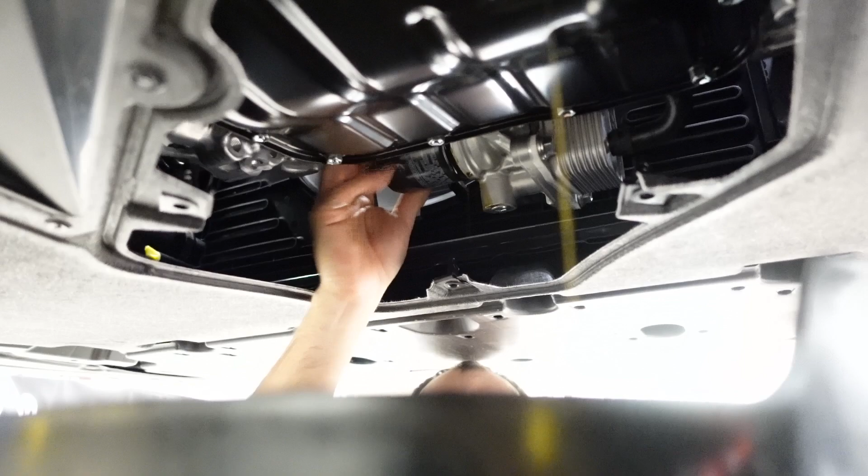Right now it's bone stock, it's done its break-in, so it's time to do a few simple things. First, we're doing an oil change. The motor has about 1,000 kilometers, 600 miles. We're using Liqui Moly Special Tec AA, Asia and America, the 5W30.

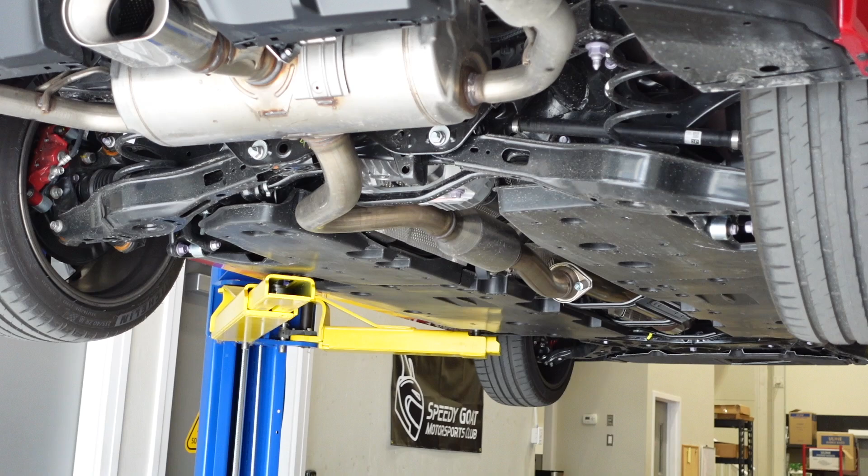We're going for a heavier weight oil because of the track use we're going to put this car through. We've got an oil filter, and we'll be doing some mild heat insulation on the exhaust to prevent it from overheating the diff. Some very mild stuff to begin with, in case we need to take this car out on track on Monday.

There's a lot more coming, so definitely keep watching.

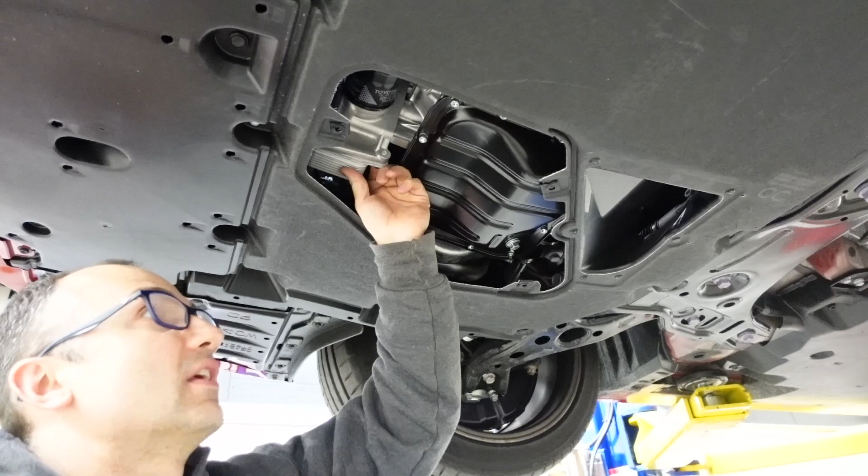I made it pretty easy. I got a filter, and there's a little water-to-oil cooler in here. You can see the transmission, and there's the oil pan. If you're going to take this car rallying, you probably want something a bit sturdier. If not, then you'll be fine.

You can also see some of this ducting done here to cool off the PTU, pointing right at the PTU in the center. The exhaust is sizable in diameter and looks like a high quality piece. I like it. This is your rear differential.

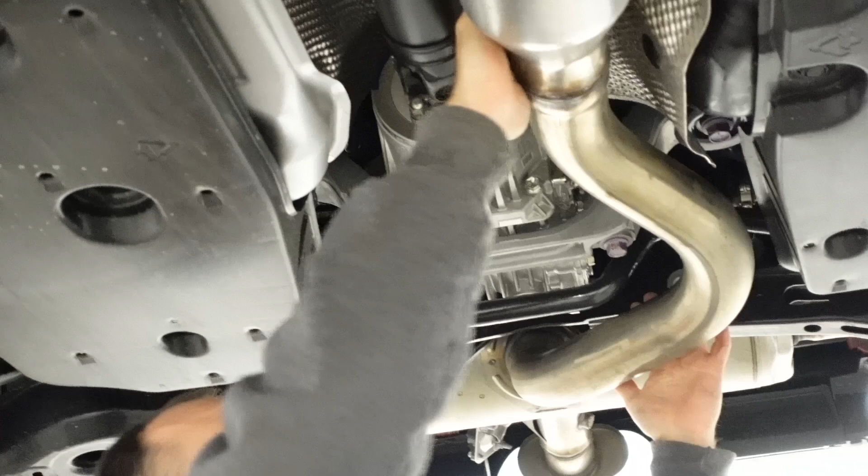The clutch pack lives in here. It's finned for cooling, but an offending member of heating this up is this exhaust. So this is where we're going to be putting that heat shield on, as well as shielding the sensor itself. I've got another way of shielding that. And then there's your three-outlet exhaust system.

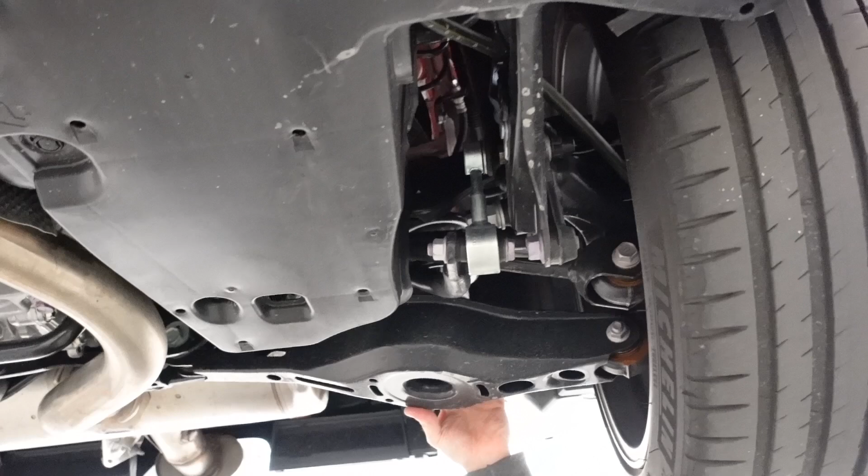Suspension-wise, this is a setup we've seen before, with the trailing arm, a multi-link rear end with springs and shocks that are separated. This cup comes out to put in springs, and I recommend replacing both springs and shocks if you're going to do springs. Of course, we've got some goodies coming in for that.

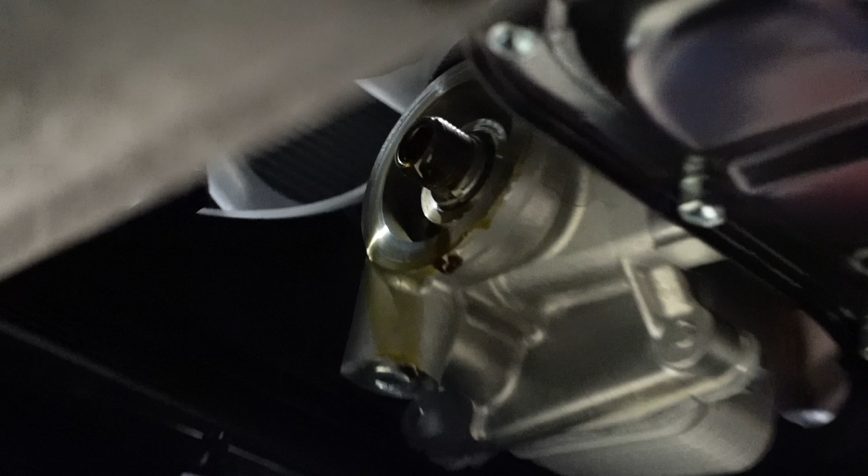Yeah, nice and accessible. And let's drain some oil.

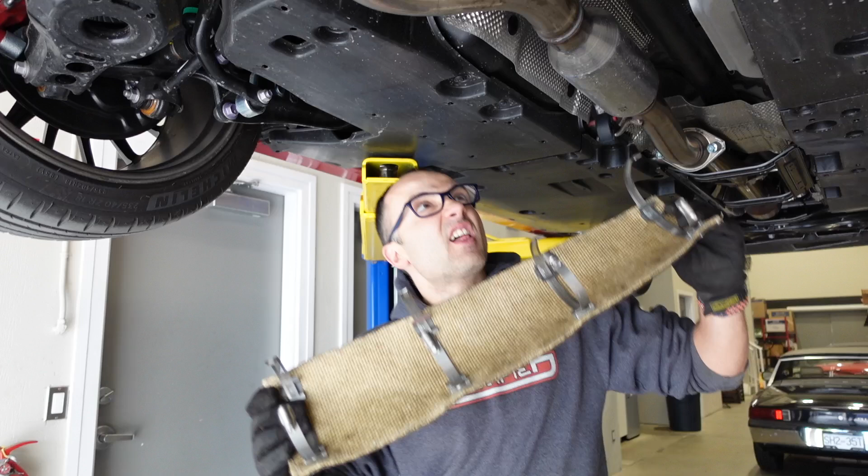One of the first things I did is make sure the sensor sitting inside the diff picking up temperature isn't going to get heat soaked from the exhaust itself. So I've wrapped the bottom of the sensor in some fire sleeve to keep the heat away from it, and now I'm going to put the sleeving on top of the exhaust itself.

As long as it's not touching moving parts.

As I promised you guys, if it was going to rain, we're going to take the GR, and it rained. So this is completely bone stock GR so far. We've got a lot of parts coming, but it was important to take the car and baseline it at our local track here, Mission Raceway, bone stock.

What can I say? It's quite capable stock. It feels good. The engine is maintaining consistent power, which is exactly what we do with our tuning as well. That's our goal, to maintain consistent power even under demanding track conditions, just like OEM in that sense, but obviously with additional power. The brakes are not fading.

We're doing a time attack style where it's three hot laps and one warm-up, three hot and one cool down. With these guys at Speedy Goat, if you're local to the Lower Mainland and want an awesome group of people to go to the track with, Speedy Goat, shout out to them and to Ryan. As you can see, the car is getting some attention.

So, weak points of the car: when it's wet, the ABS goes into a sort of an ice mode once you engage it. Not super great, not a lot of feel in the brake pedal that way, but if you stay out of that ABS zone, it's obviously much better. The tires are only PS4s, so good in the wet, especially new as they are right now, but as it dries up they start to squirm around a little bit.

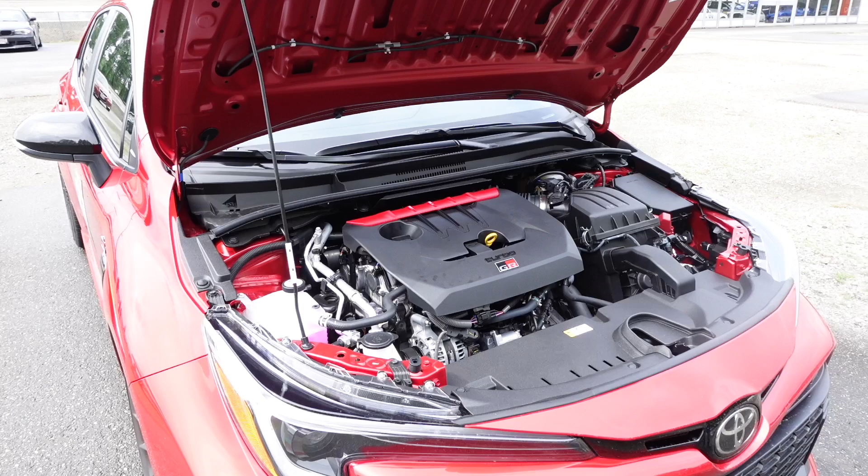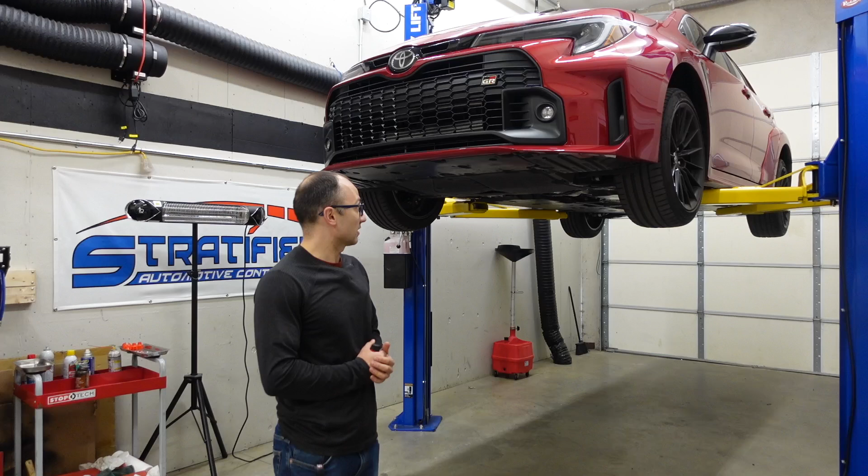All right, so we're back from the track. Overall the car was really great on track at our Mission Raceway. The track isn't terribly long, doesn't have a lot of elevation change, but it's got a lot of hard work for tires and brakes. So I'll start on that.

First, when it was wet outside, I noticed the ABS was a little difficult to manage - the car had what you'd call an ice mode. If you engaged ABS a little too hard, the brakes felt like they didn't really want to stop you. That's an ABS programming issue, not a brake strength issue. However, once it dried up, the brakes stayed very true and powerful. These are completely stock brakes, and this isn't even a circuit edition, so it doesn't have the extra duct to pull air in, but they were strong - absolutely no fade.

Another aspect of the car that was very good was the power. On the stock tune, power stayed consistent. We're going to get this car on the dyno very shortly here and calibrate ourselves with our own tune. It was very good throughout the day, so it didn't let me down.

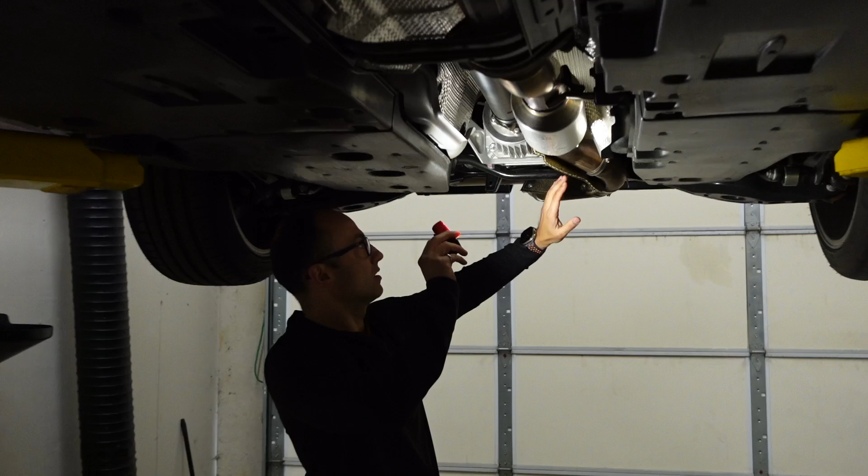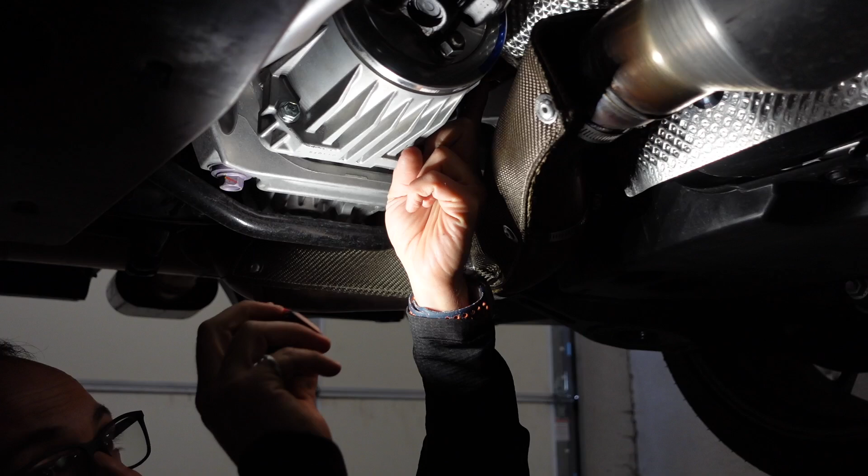The modification we've done to the exhaust has stayed together. Here we have the heat shield, the heat blanket shielding the differential, and we never had any issue with the all-wheel drive system. We drove it in 50/50 track mode, no overheating, no issues, pushing the car hard, and we have this heat wrap and the sensor up here that's also heat protected.

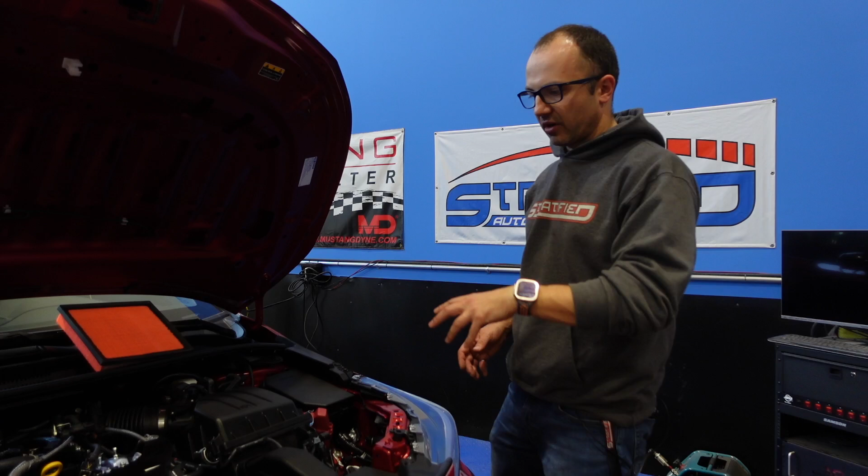We've tuned this car stock, baselined it against the stock calibration, and we did get a good bump in power, especially torque. What's interesting is we've had a number of these cars on the dyno now, and they've all had some sort of intake installed. Comparing our car to the other ones - I'll show you guys the graphs in just a bit.

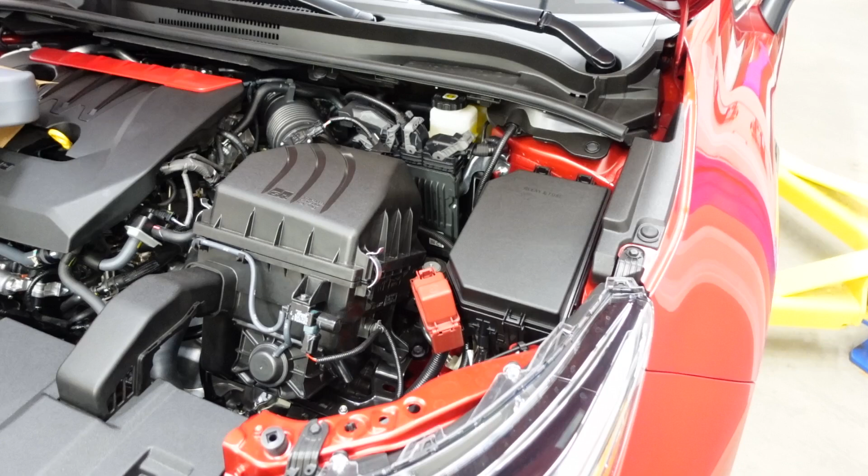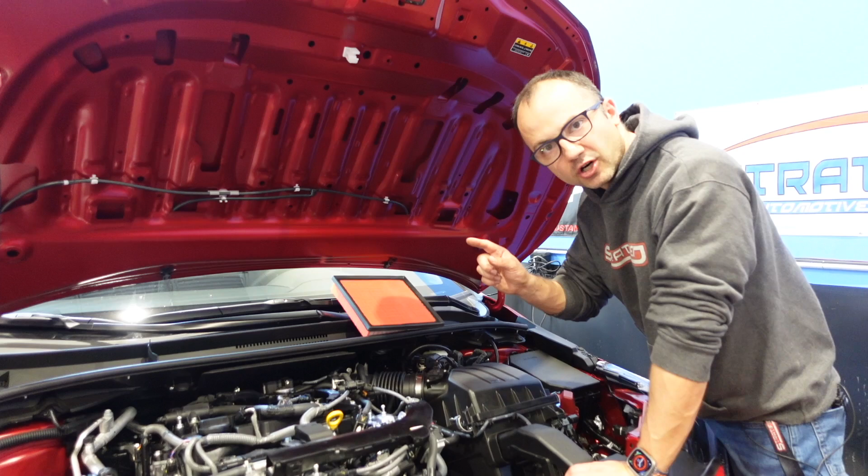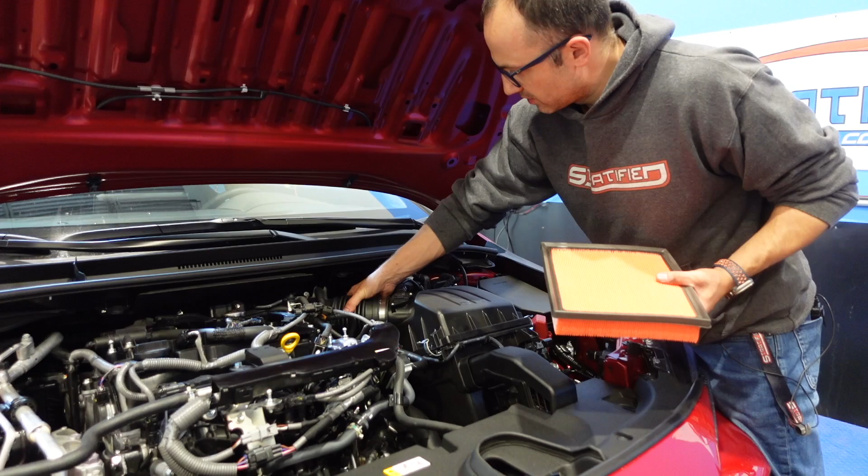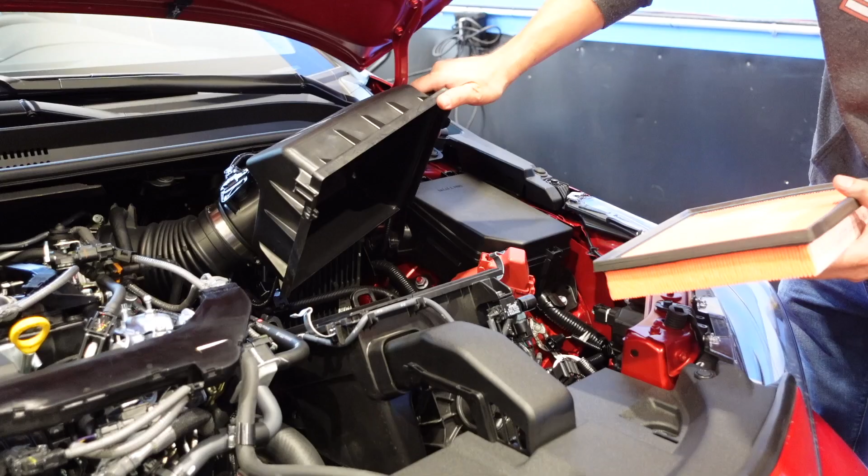With the stock intake, and we had a car that just had an intake as a power mod, you notice two things. First, the top end drops off more with the stock intake - the aftermarket intakes we've seen, the Venturis, are able to gain power up top. The other nice thing about this car is it's got a pressure sensor pre-turbo, which tells you how much of a restriction an intake is. Just looking at the stock intake and airbox, it's got a pretty sizable elbow going into the turbo, so it doesn't look too small. Then you've got your air filter, which is just an OEM paper air filter. The diameter isn't terribly large, and the entry point even has a little snorkel right before it, then the filter just fits right in.

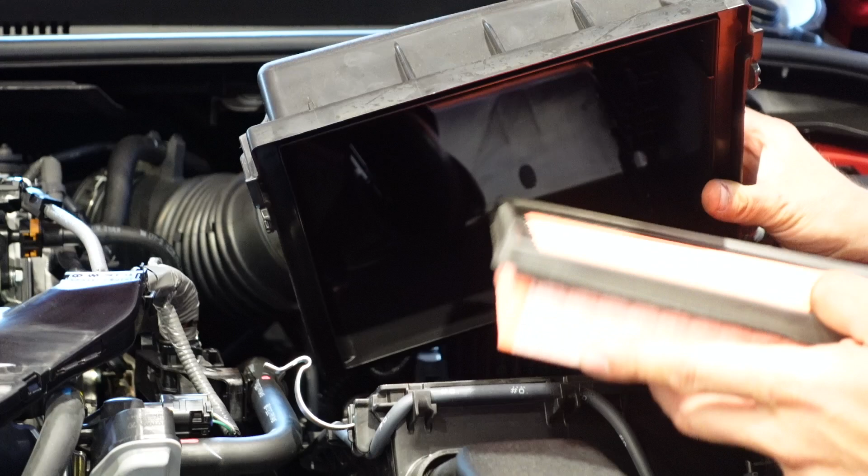So not much of a restriction going on the top of this airbox. However, the bottom gets a little bit more interesting.

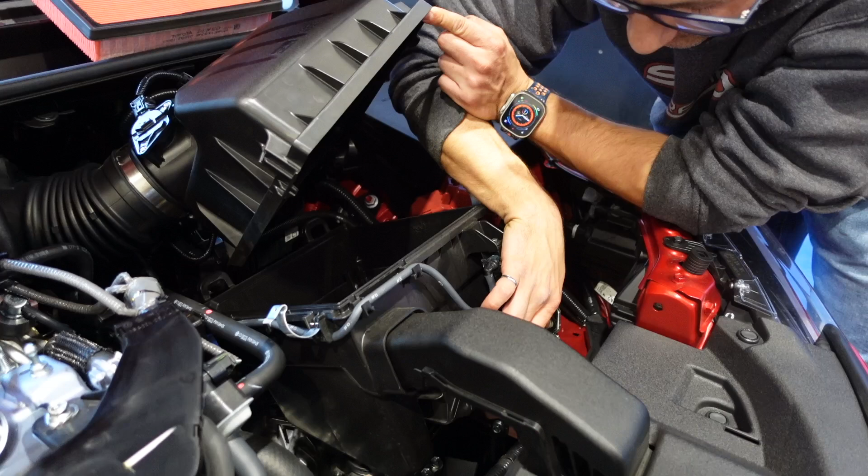So you've got, first of all, this inlet here. When your flapper door, I'll call it the flapper door in the intake, is closed, your only intake air is coming through this small opening in the airbox. Reading the sensor that is pre-turbo, I can tell you that this flapper door opening at the bottom, and I'll demonstrate how it opens in just a second, significantly reduces the restriction of the intake.

Couple that with the fact that we've seen the aftermarket intakes perform quite well on this car. What I want to do is run a few tests here on the dyno, modifying this stock intake to see if indeed it has a restriction.

Already through tuning, we can adjust when this flapper door opens. Stock, it opens at 4,000 RPM, and if you're pushing for more boost, especially early on, this is definitely a restriction. So of course we make adjustments for that in our tuning.

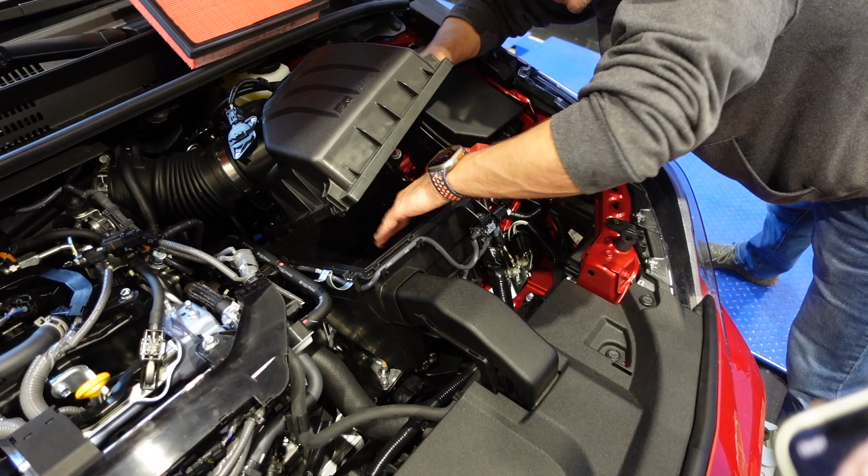Now, if you want to see the operation of this thing, it's kind of neat. I'm going to suck on this, which is exactly what's happening. When the solenoid opens, there's vacuum pressure across this line. It's new rubber at least. So this door opens right here, and then the car pulls air from down here.

Now it's not the best place to pull air, just because you've got your radiator and a little bit of heat build up in that area. So I've seen the aftermarket intakes move this, create snorkels in here and so on.

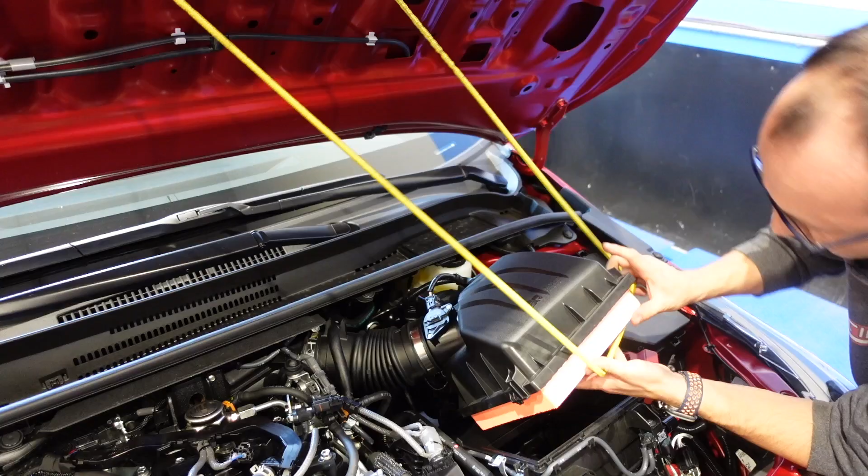But just with the stock intake, I want to test the theory that the intake is a restriction beyond just opening this. So what we're going to do is use the top of this intake box. We'll strap on this stock air filter and look at what kind of gains we can get by just having the top of the box and the filter pulling in air, versus this entire bottom piece, in the name of science, just observing how much of a restriction this intake is on its own.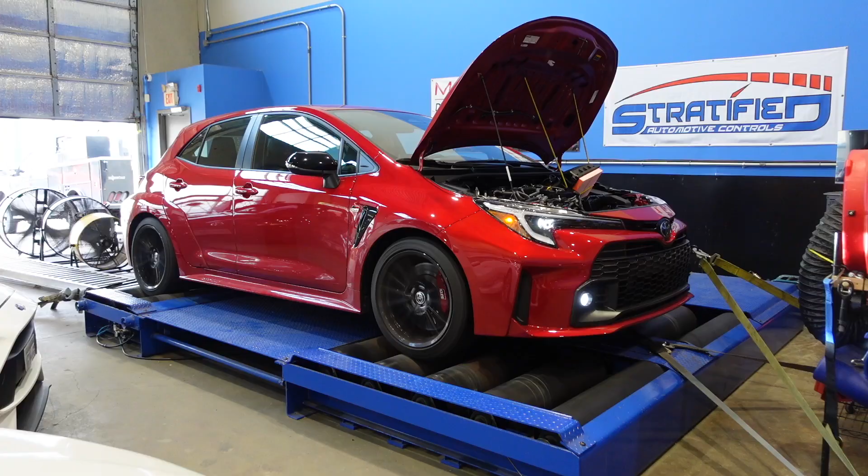We are in our bone stock GR Corolla in terms of hardware, because we really wanted to get the baseline done for this car and then build our tune from a stock vehicle.

You've seen our previous video of a car that was more modified than this. So this is starting from the very beginning, and there's a lot to go through here. Hopefully you can keep your attention, and I'll try to keep it very much to the point.

During the process that we tuned this car, EcuTek actually released a much awaited version 2 RaceROM, and this gave us a very good feature, actually multiple good features. We've got launch control, we've got flat foot shifting, and more importantly for tuning, we've got map slots. And map slots allow me to do this.

So I can take a 93 tune or a pump gas tune and put it in slot 1. You can see I hold down the cruise control cancel button, it shows me what slot I'm in, and then I can have an E30 tune, for example, or a more aggressive tune in slot 2. So now I'm in slot 2. You can always verify which slot you're in by holding the cancel button.

It will jump to 2000 RPM. The car can be running, so for example, I can turn the car on here. So here you go, I'm holding it down. There's slot 2, and then there's slot 1.

That's something that we can do for you guys now because of this new software release. So not only did we tune the car on the OEM tables, but now we've got this tuned on the new EcuTek V2 RaceROM, and we can do that for you guys as well. It makes it really easy to swap between maps and swap between blends.

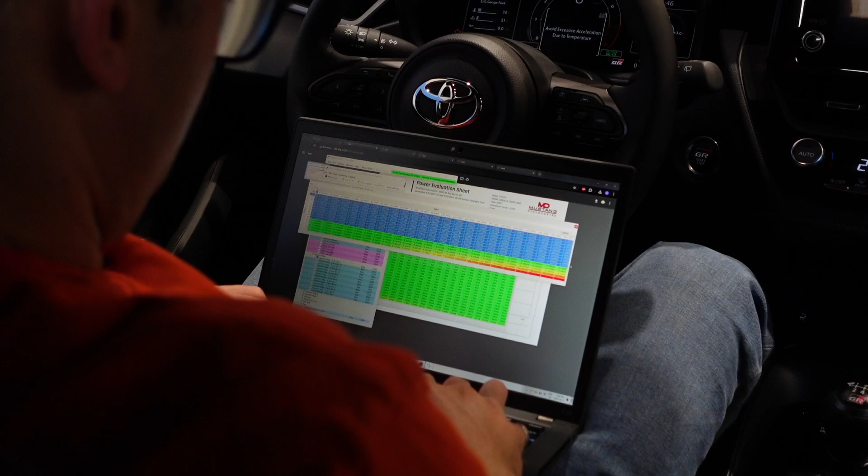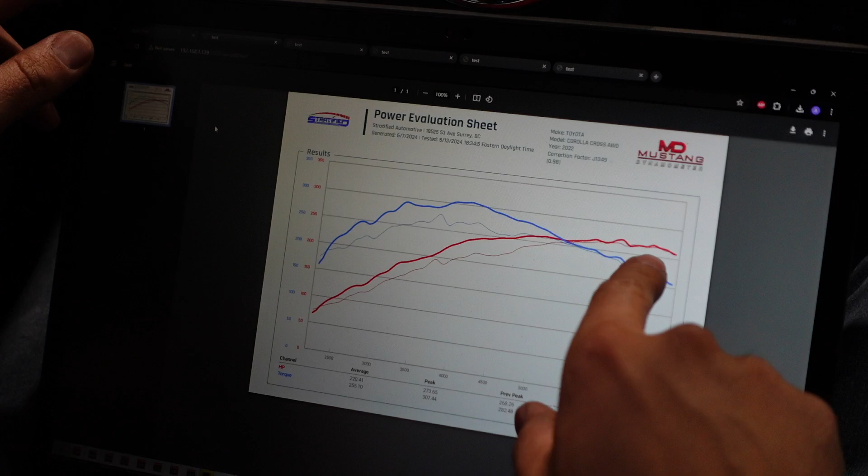On to the meat and potatoes of the tune. First of all, we have the car here tuned on the OEM tables on pump gas. What you see compared to the stock tune is that we gained a whole bunch of torque, but up top we didn't really gain much in terms of performance. The biggest reason for this is because this car is quite high strung.

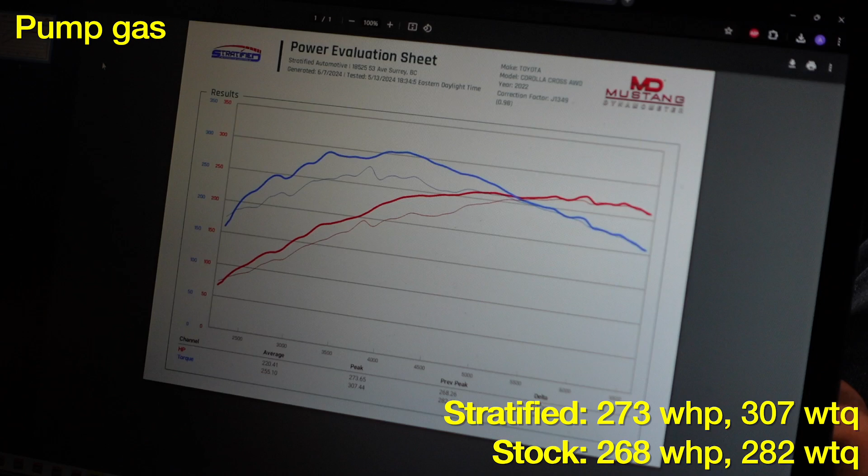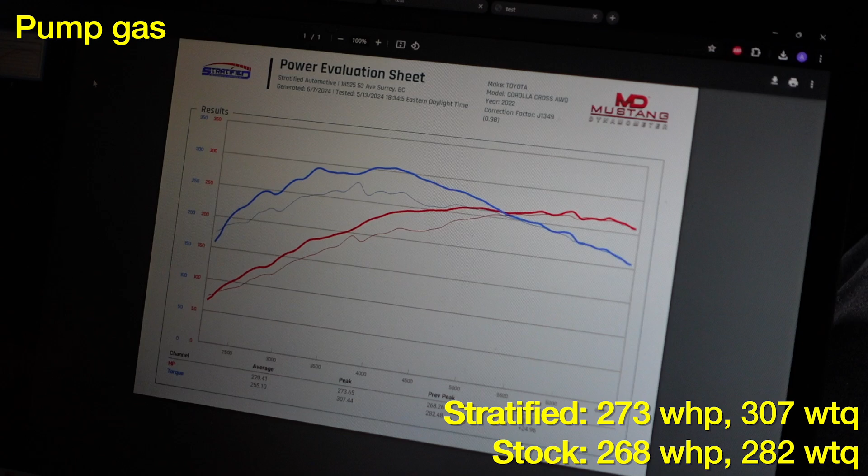It's a 1.6 liter 3-cylinder, and it is very octane sensitive. So we saw that it was knocking in this area and had to keep it safe. It is definitely faster, and it will punch harder. It'll have smoother boost control and all that on pump gas, but the top end was a little lacking. So now we did a little experiment on the top end.

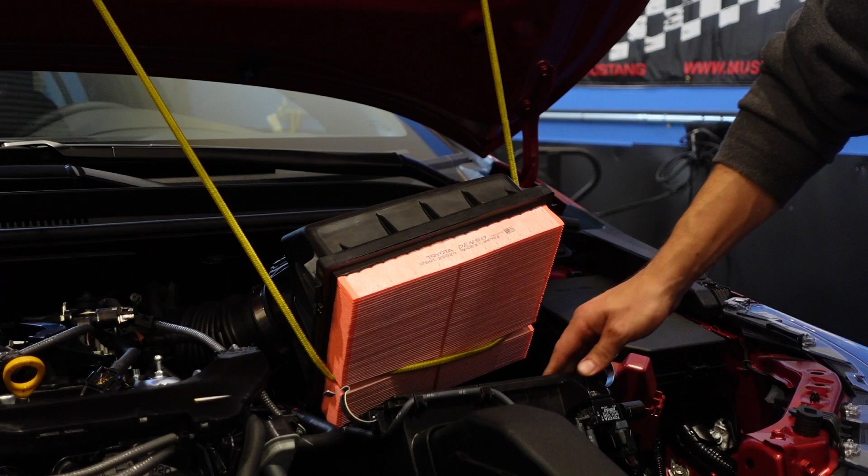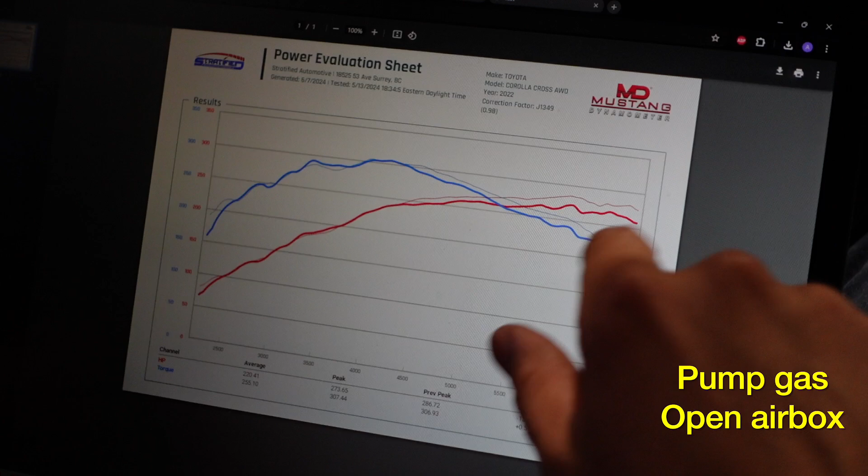The first thing we did here is we removed the air box. We basically lifted it up from the lower housing and kept the air filter on. Lo and behold, this kind of mimics what an intake does on the car. Of course, not as optimized as something like an Eventuri, but it gives you an idea. Without changing a tune, we picked up 13 to 15 horsepower in the top end. Yes, that means intakes are good for this car. The top end flow is optimized, and it also shows you the flexibility of the tune.

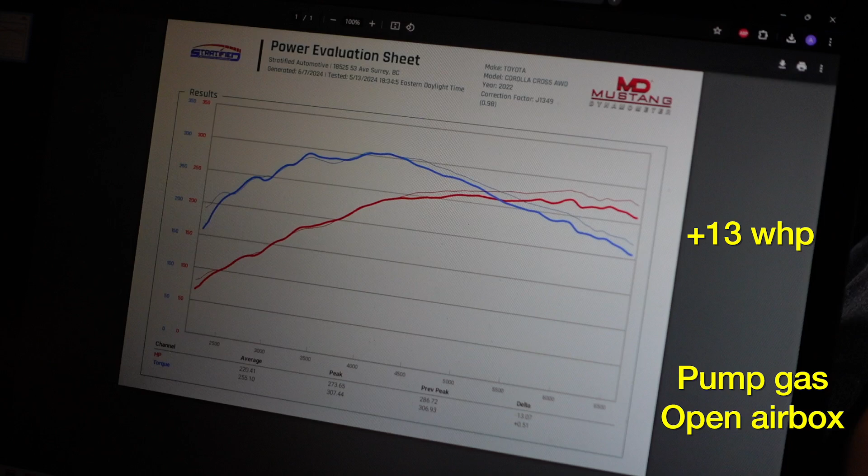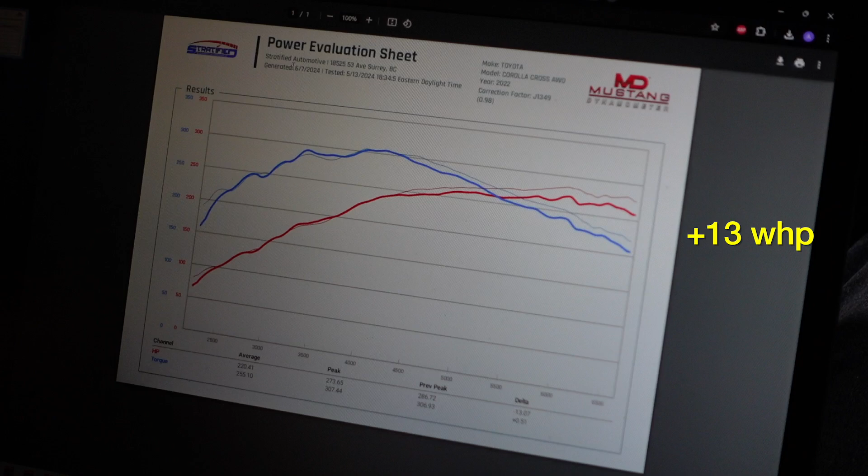So you can throw on a part, and even without optimizing, although I always recommend optimizing, you're going to get an increase in power. Because of the way we set up the tune in these cars to have flexibility, I was able to do another test: throw in some ethanol in the tank, E30 to be exact, and then run for fun the pump gas tune.

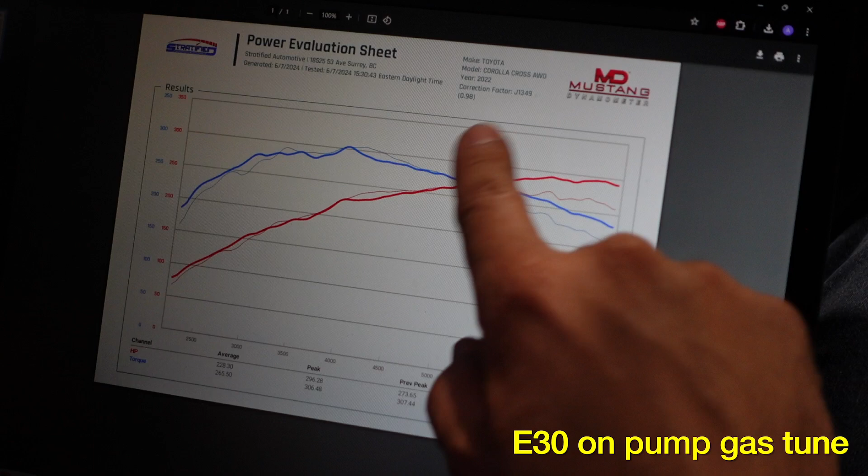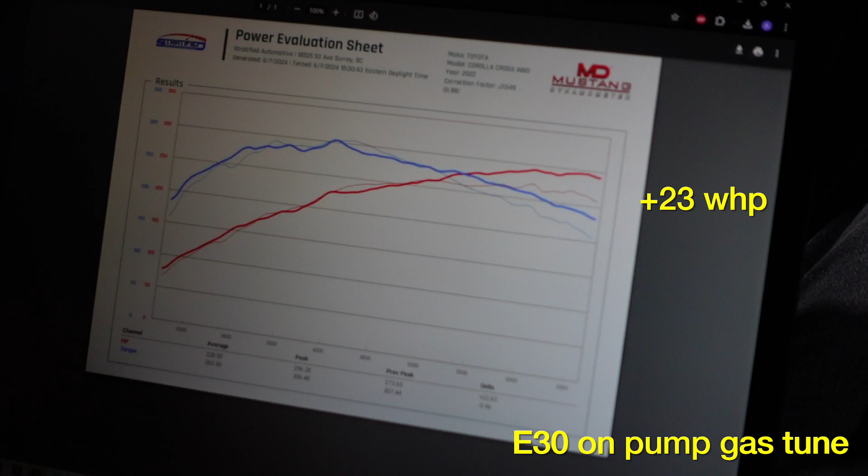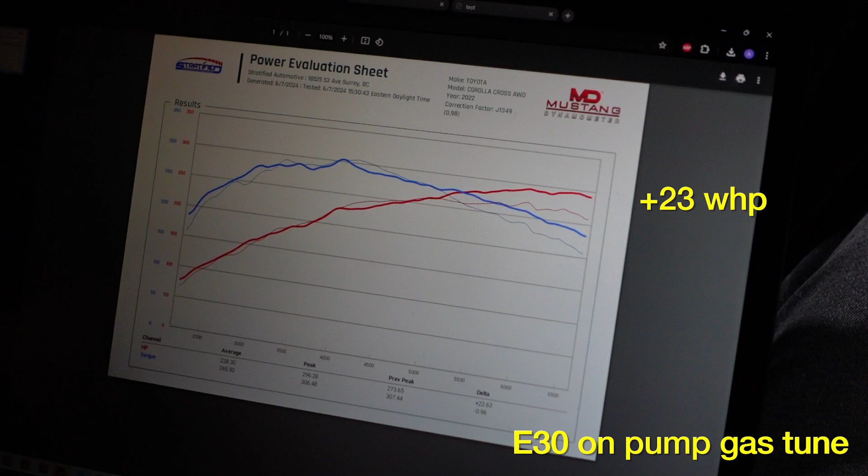Look at this. The torque, where we made the gains before, has remained pretty much the same. However, the top end is there. So this is, again, no hardware changes, just putting some ethanol in the tank on our pump gas tune. We picked up about 22 to 23 horsepower here, and that's because there's an adaptive ignition system and ignition protocol in this car that allows it to add additional timing if it doesn't sense any knock. This is a strategy used by the OEM, but it's also a strategy we use in our calibrations. So you run higher octane fuel and it performs better up to a certain point, because we don't want to be super aggressive for the pump gas tune, but there is some nice leeway.

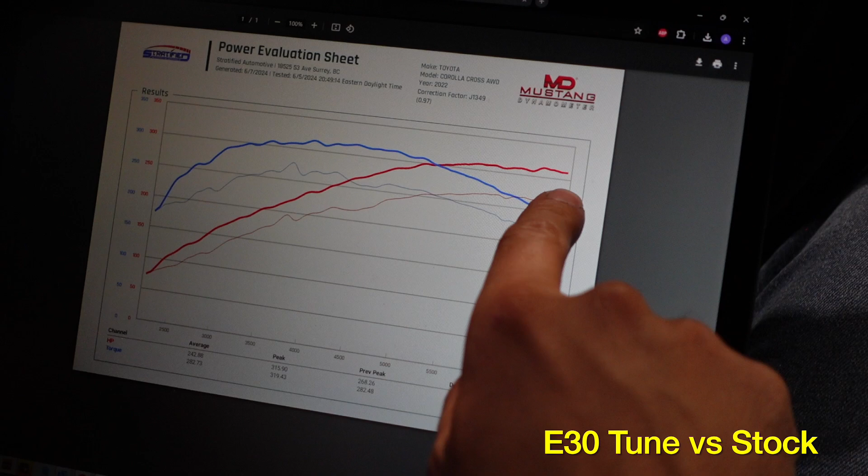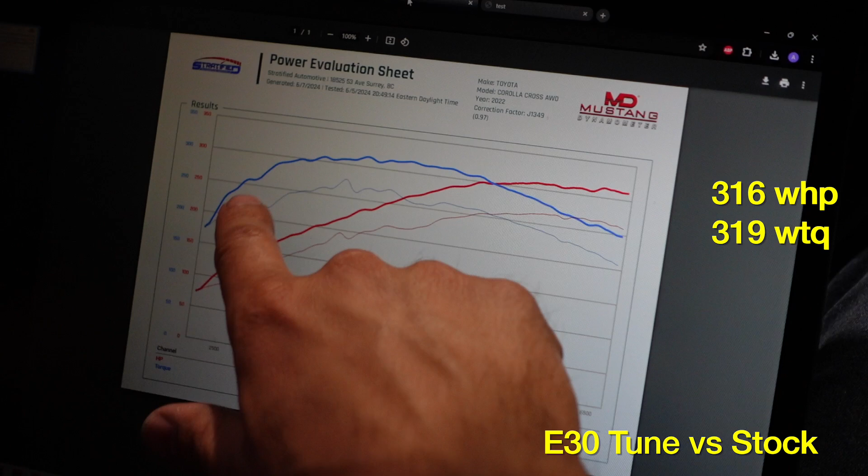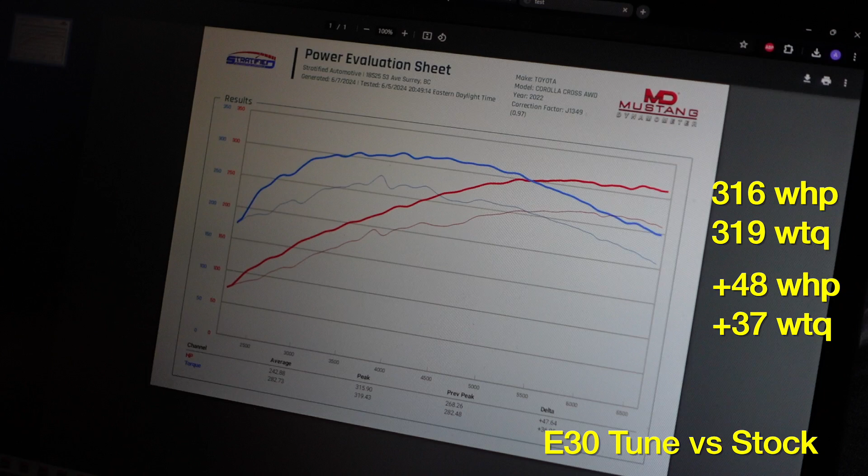Now we're going to jump to the next slide, showing the ethanol tune, which is the most powerful variant without changing any hardware on this car. This is maximizing it. It's making 316 wheel horsepower with a very nice and smooth torque and power curve, and this is comparing it to stock. So now you've picked up almost 50 wheel horsepower over the stock tune with no hardware changes whatsoever, just tuning and running ethanol. And again, this tune is optimized for ethanol.

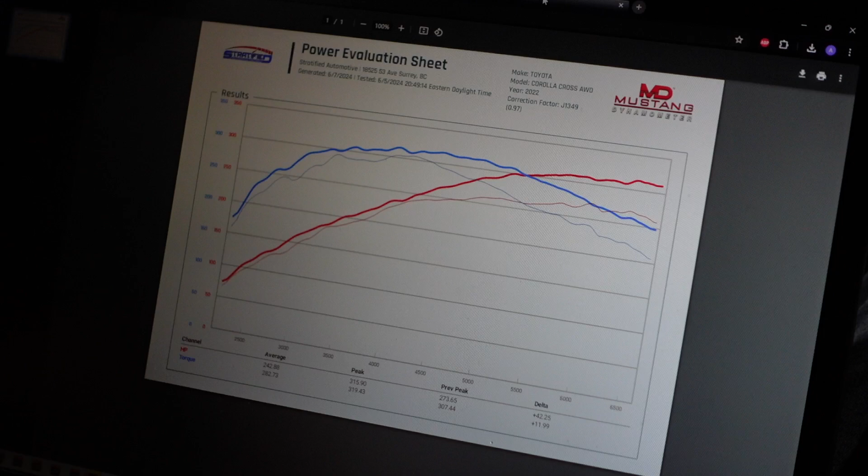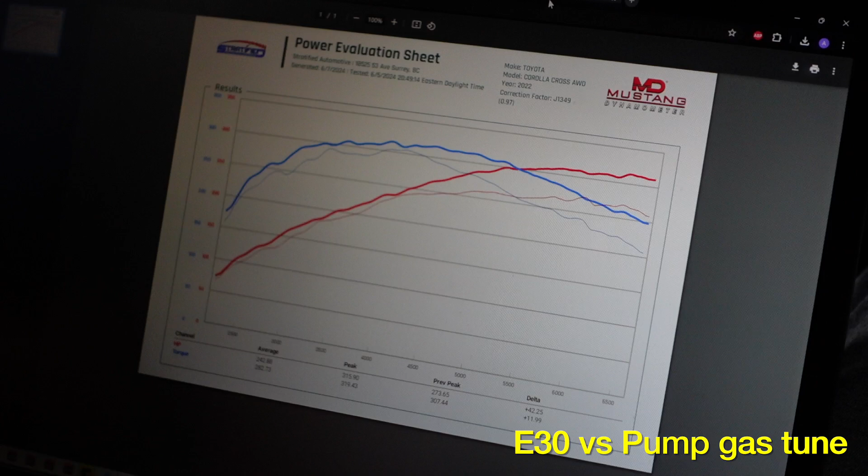Finally, this is the comparison of the pump gas tune, the faint line here, and then our ethanol tune. Notice that down low the torque is higher, but it's not as high as this top end. You saw how even the pump gas tune picks up due to the flexibility we built into our tune. It picks up some horsepower, but now when we properly optimize this for ethanol, the entire power band picks up.

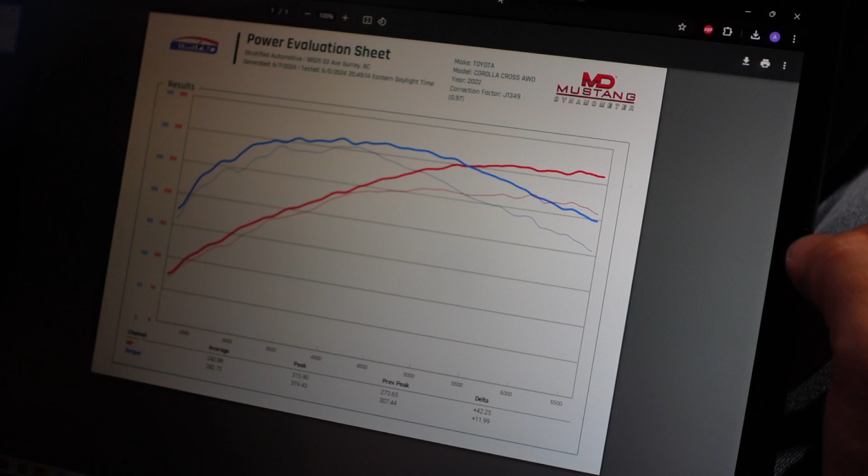This is really nice because with the new software from EcuTek, which is rolling out with all the tunes we send you, not only do we have the ability to give you map slot switching, so you can switch your map slot based on what fuel is in the tank, making it easy to go from pump gas all the way to ethanol with just a flick of a switch and a change of fuel, but we've also really optimized the boost control. This is now fully optimized on the new EcuTek software, and you can see how smooth that boost is. We did a lot of work in the background to optimize this, and you're going to feel it during a full pull, and every time you come into boost at any point in the RPM band.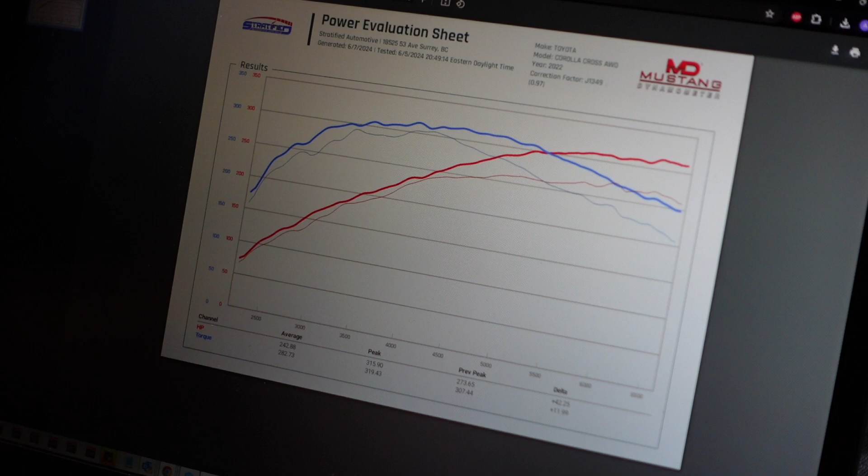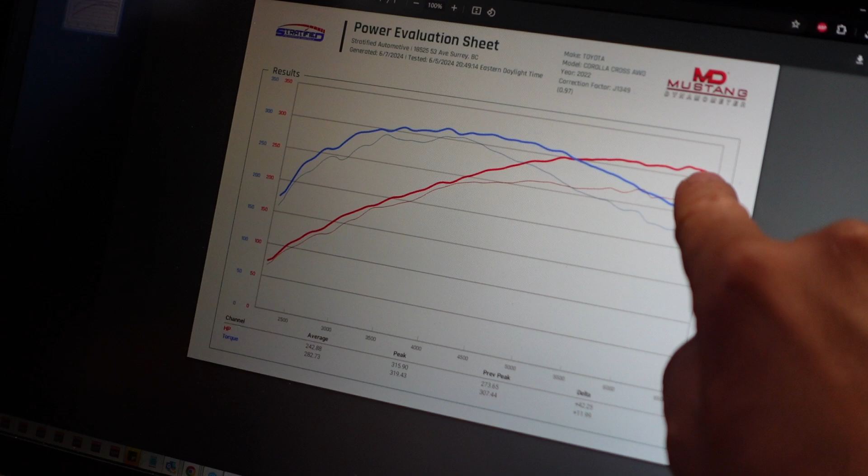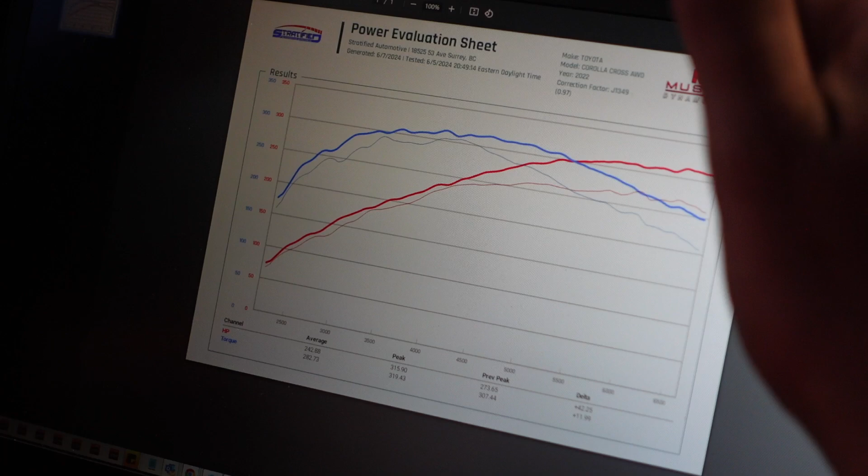So super happy to share these results with you guys. It really shows you how well the engine can perform, how nice that horsepower curve is. We're peaking power very close to 6,700 RPM here, which is super impressive for an engine this small. The power doesn't fall off. Some of that is thanks to ethanol, but a lot of it is thanks to how we're able to set up these calibrations.

So what's next? Well, there's a lot still to do in terms of hardware changes. We're going to start putting parts on this car, and we're going to show you guys the process of what one part at a time does, what you can expect from it, and how the tuning mixes in with all this to optimize it.